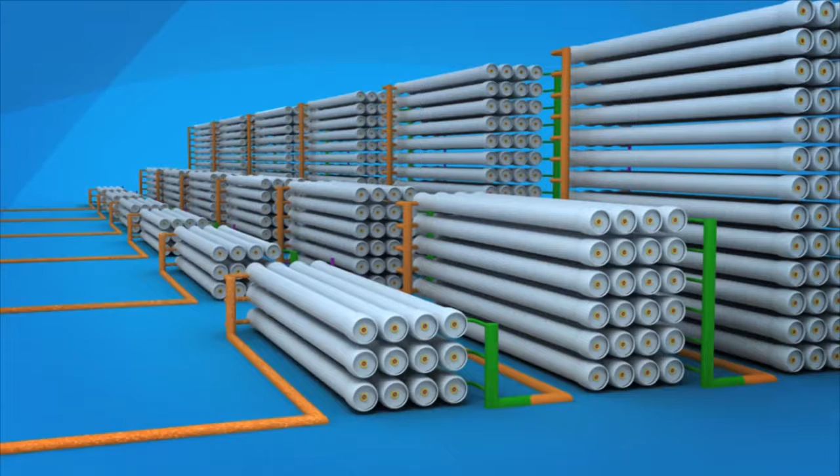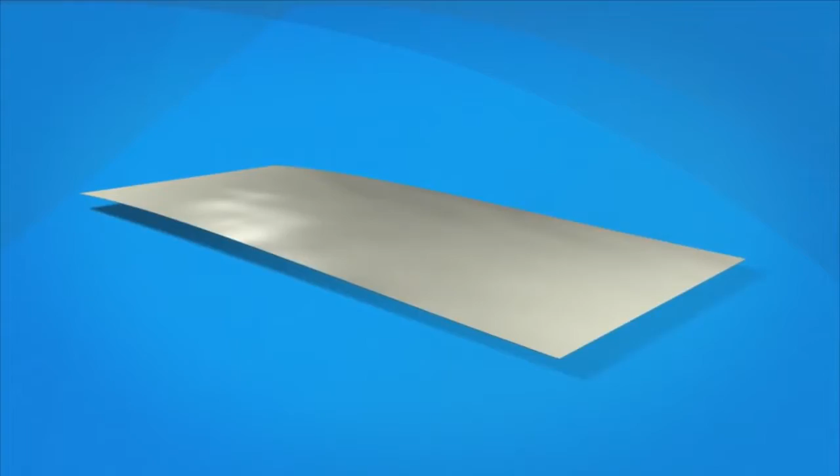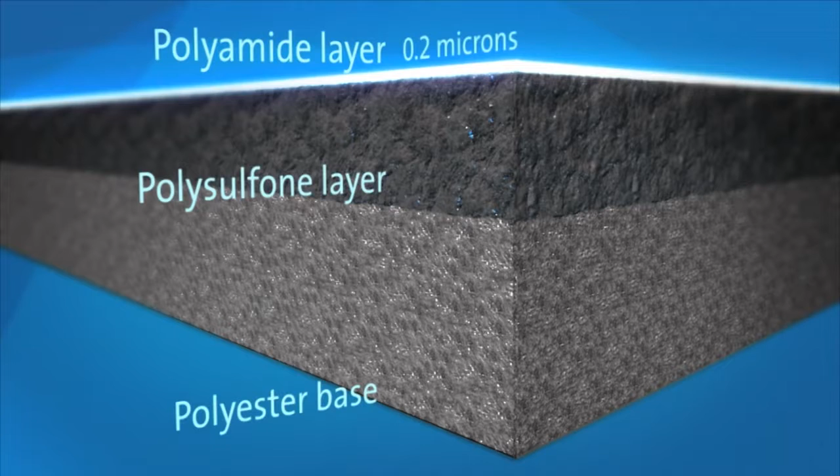Further treat wastewater after the ultrafiltration process. Reverse osmosis membranes are constructed from a membrane flat sheet. It is comprised of 3 layers: a polyester fabric support base, a microporous polysulfone layer, and a 0.2 micron thick polyamide barrier layer. The polysulfone layer strengthens the very thin barrier layer. It is the barrier layer that removes nutrients, chemicals, bacteria, and viruses from the water.

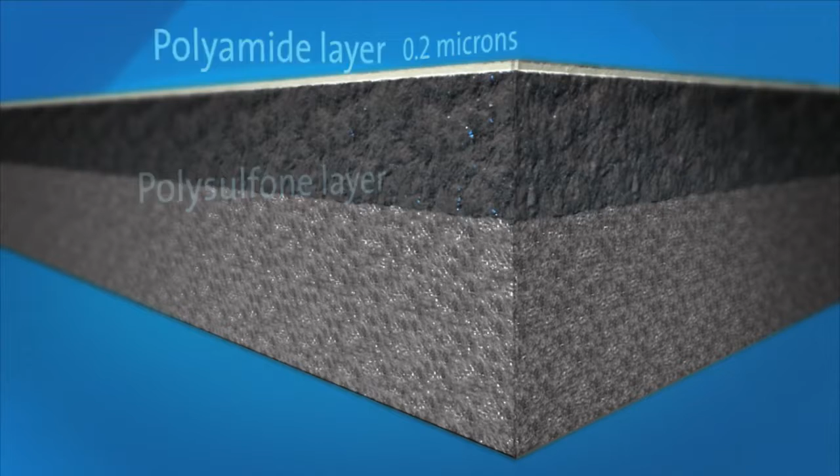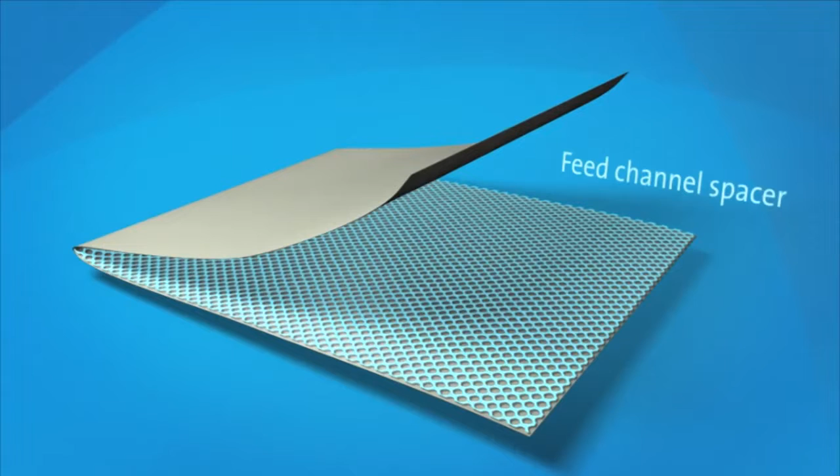The membrane flat sheet is combined with a sheet of feed channel spacer. This provides turbulence and creates space between the membrane sheets for the feed water. A sheet of permeate spacer is added to the membrane sheets and feed channel spacer. This enables the final recycled water product, or permeate, to flow evenly across the entire membrane surface, even under high pressure.

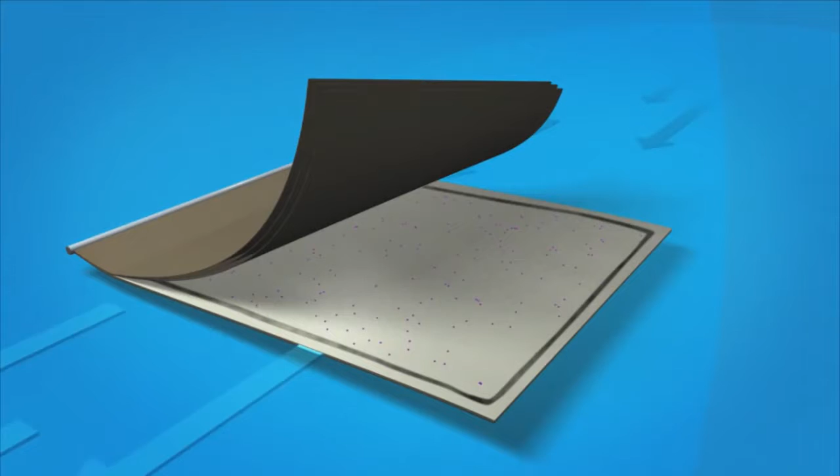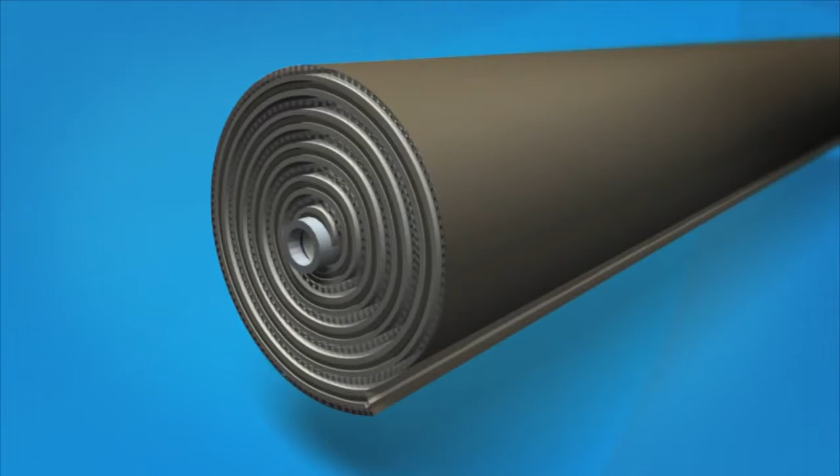The back of the membrane is completely sealed to the edges of the permeate spacer. The membrane sheets are glued along each of the 3 exposed sides and rolled around the core tube. Feed water is forced through the feed channel spacer and into the barrier layer of the membrane. Water passes through the membrane surface into the permeate channel. It flows in a spiral direction and collects in the core tube. This water is the final recycled water product, or permeate.

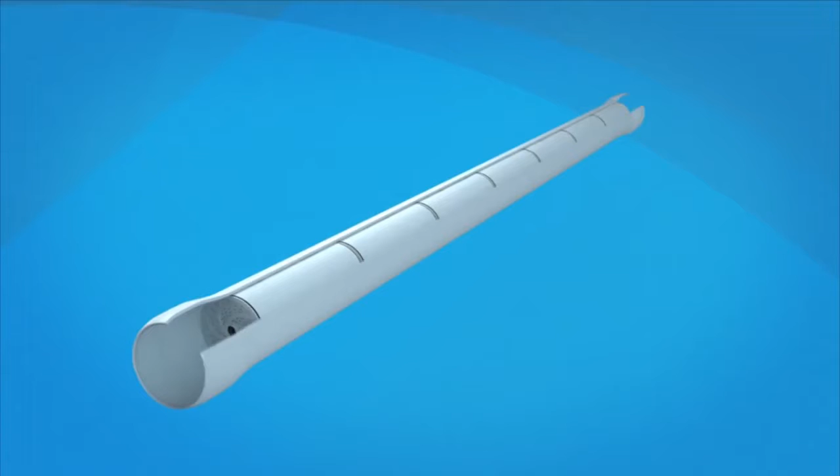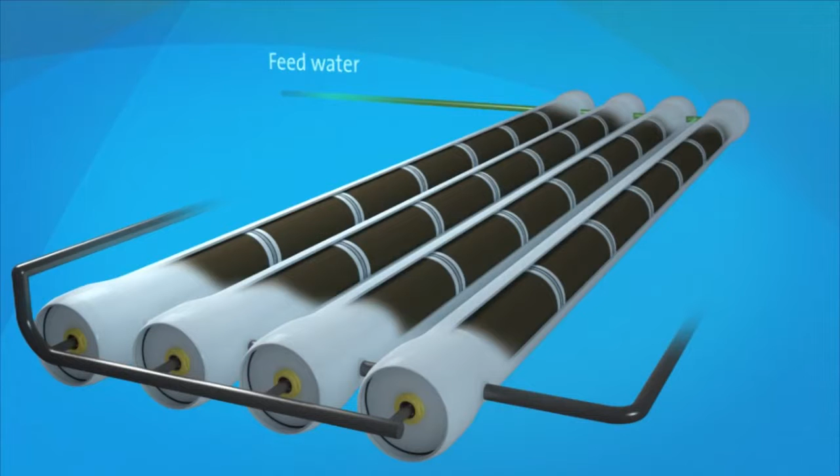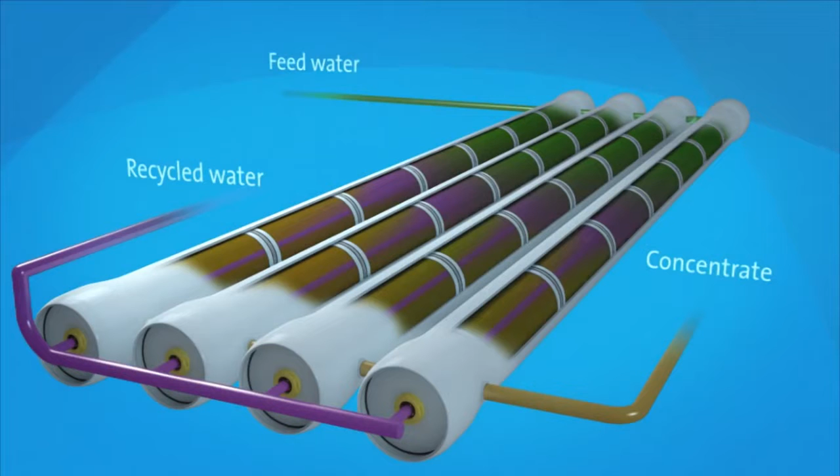There are 7 spiral wound elements loaded in one pressure vessel. Once the end adapter is connected to the last element and the pressure vessel is sealed, feed water can be introduced. Feed water is pumped at high pressure into the vessel. As it travels, small molecules like water pass through the membrane, while larger particles such as salt, bacteria, and viruses do not. The final recycled water product is collected from the end of the elements. The concentrate or reject from that vessel flows to another stage, producing more recycled water.

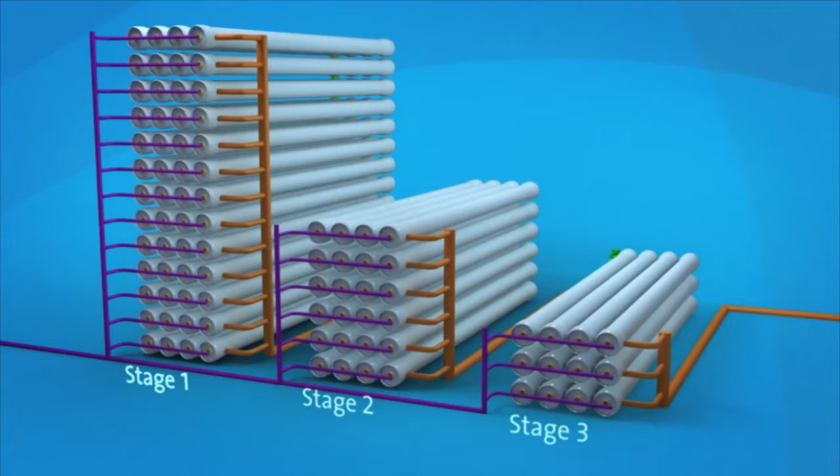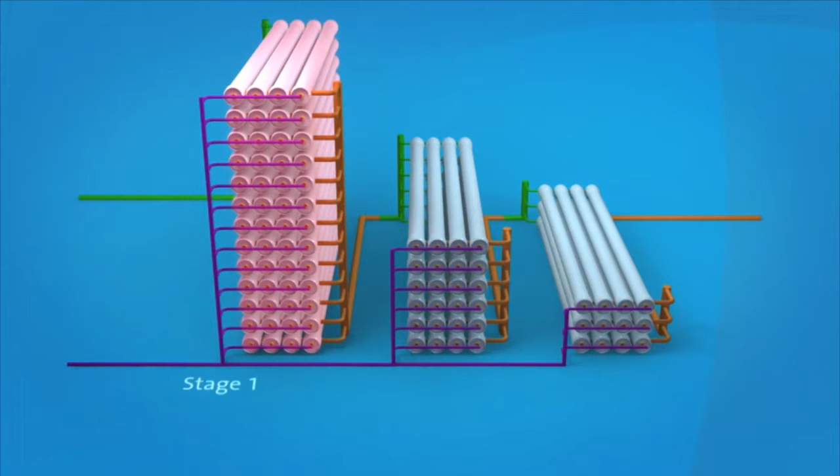At St. Mary's, there are 6 reverse osmosis treatment trains, each with 3 stages. This design produces the highest amount of recycled water with reduced concentrate waste. Stage 1 has 52 pressure vessels, Stage 2 has 24 pressure vessels, and Stage 3 has 12 pressure vessels. 58 million litres of feed water enters the reverse osmosis system on a daily basis. As the feed water passes through each stage, more recycled water is extracted.

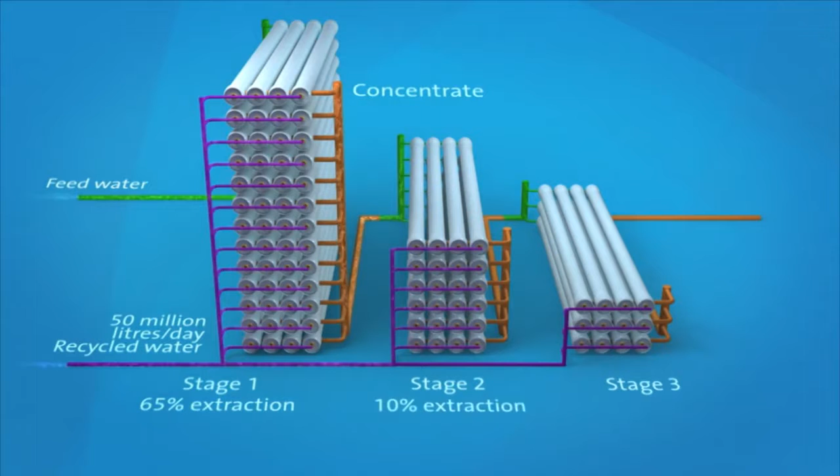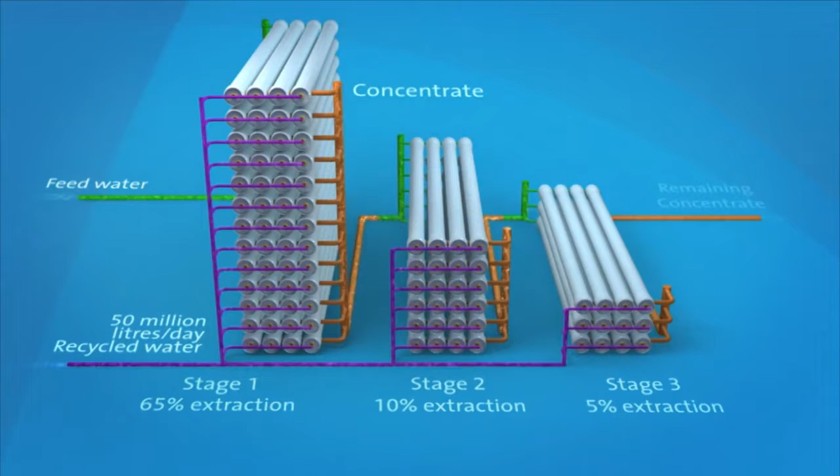65% of recycled water is extracted at Stage 1. The remaining 35% is passed through Stage 2, where a further 10% is extracted. The final 25% is passed through Stage 3, where the last 5% of recycled water is extracted. 80% of all feed water is recovered as recycled water.

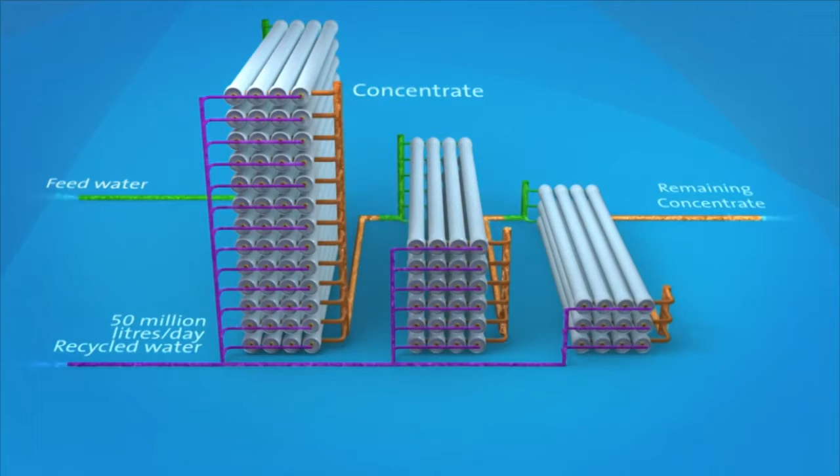An average of 50 million litres of recycled water is produced every day at St. Mary's. The remaining concentrate contains so much salt and impurities that to recycle it would not make economic sense. This concentrate stream of 8 million litres a day is sent to North Head Wastewater Treatment Plant, where it is treated and released into the ocean.